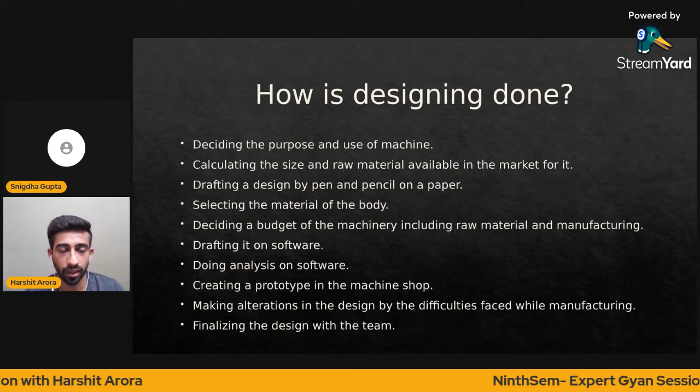So, how is designing done? First, we decide the purpose and the use of the machine that we want to achieve. Then we calculate the size and suggest the raw material necessary for designing the machine. Once that's done, a team of engineers sit together and draft a design by pen and paper, including every engineer - be it from electrical, design, or electronics field. They discuss about the ideas, and then the mechanical engineer works on softwares like SolidWorks and AutoCAD to develop the machine on it.

Once the machine is developed, the role of a mechanical engineer is to do the analysis on the software. Analysis is basically studying the structure, the dynamics, and the statics of the machinery, so that any load or stress calculations or any fluid involved are taken into consideration, ensuring the design meets the needs of the client, and a machine to be used is finalized. Thank you. Next slide, please.

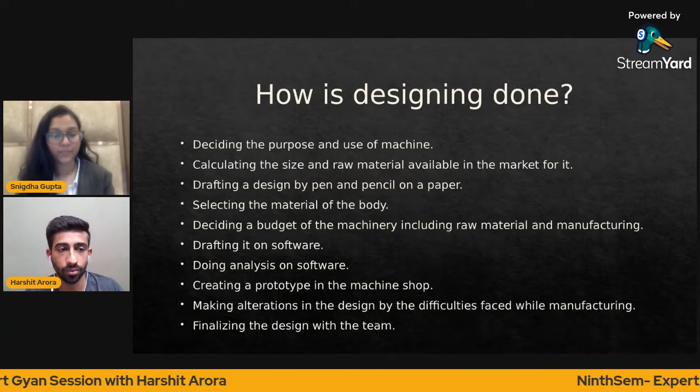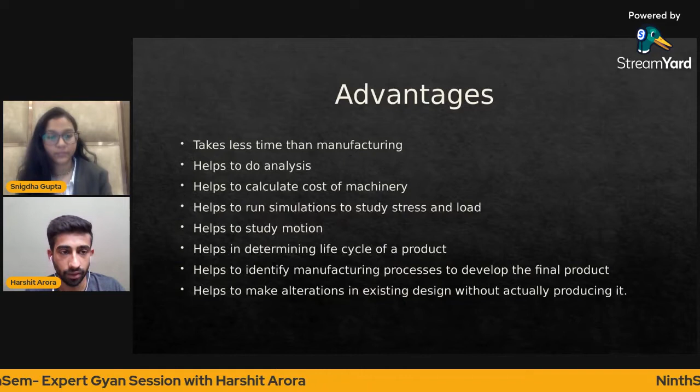So, what are the advantages in designing? The advantages in designing when it comes to manufacturing are that it takes less time, because in designing we can do it on computer, while in previous times everybody used to think of an idea and then do it physically, so as to get to the point that the machine should be manufactured.

So if heavy machinery is involved, it will take a lot of time and money. But if this manufacturing is done on computer, it takes less time and all the analysis can be done on the computer. Also, once the machine is manufactured using older physical methods, there might be defects, requiring redesign and more time and money. But when designing was developed digitally, the machines and every part can be minutely studied, and the time and money involved can be reduced to a minimum. Next slide, please.

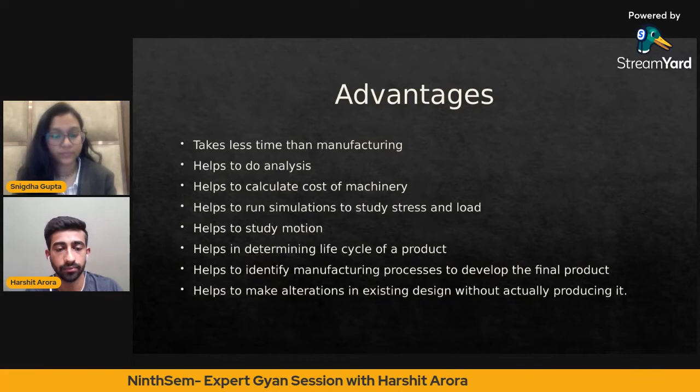So the various design software that I use and a design student should be using in order to make their career in designing should be AutoCAD 2D drafting, AutoCAD 3D, that is Fusion 360, SolidWorks, CATIA, Pro E, and NX. These are the software that a person should know or use in order to get to know about the design. These softwares can be learned on any platform, be it YouTube or any courses, and you can study it.

Once the design is done, the most important step is the analysis part, because design can be designed by anybody, but it has to be feasible and has to be manufactured correctly in order to meet the industry standards.

So for that, we use different softwares like ANSYS for finite element analysis, CFD analysis when fluids like gases and liquids are involved. We use SolidWorks, Fluent, HyperWorks. When it comes to checking cooling systems in HVAC etc., we use Flow therm and Ice Pack. Also, MATLAB is used in order to check the analysis and design of the machinery.

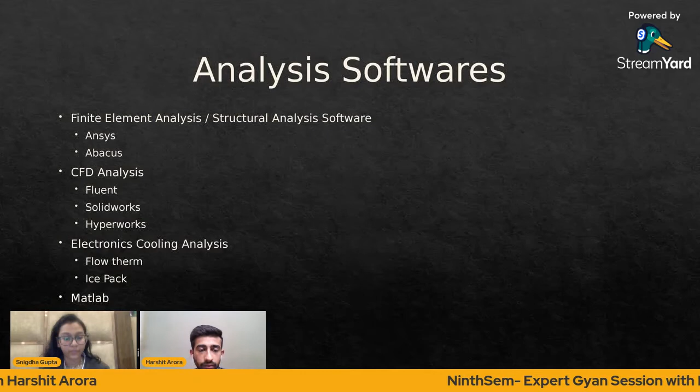Also, a student should know Python, C++, and other visual basic coding languages at a basic level, because these softwares require a coding language to be learned by the student. Also, Microsoft Excel is a useful tool in this, because these tools are data-driven tools, so in order to study and provide data to these softwares, Excel has to be learned.

Design standards. When it comes to designing, there are a lot of design standards that are involved. So you cannot just design anything which comes to your mind. There have to be rules and regulations that have to be followed in order to design something.

Like when a coupling or a flange is designed, it is to be designed in the inches system, or a gear has to be designed. So the pitch, the number of teeth, diameter, and depth of teeth are standardized, and that is the way those are manufactured.

So the design standards are ruled by various organizations like ISO, the International Standard Organization, ASME, the American Society of Mechanical Engineers, and European norms are also used.

So as we funnel to the design opportunities that are present for various students, there are various fields and a number of fields where design can be used, and mechanical engineers are being employed.

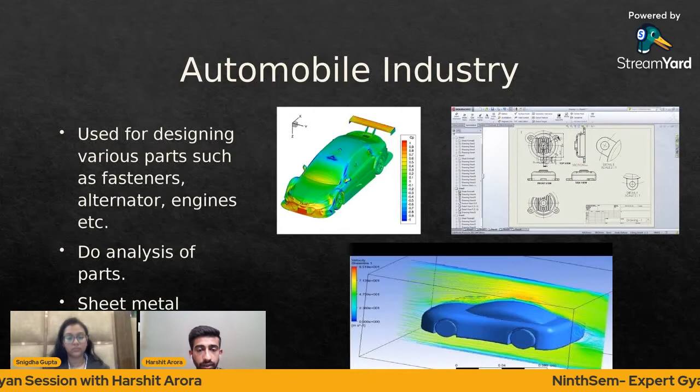So next is the heavy metal parts in industry. Then next is the aerospace. This is the second slide, I guess. Automobile, then heavy parts, I guess.

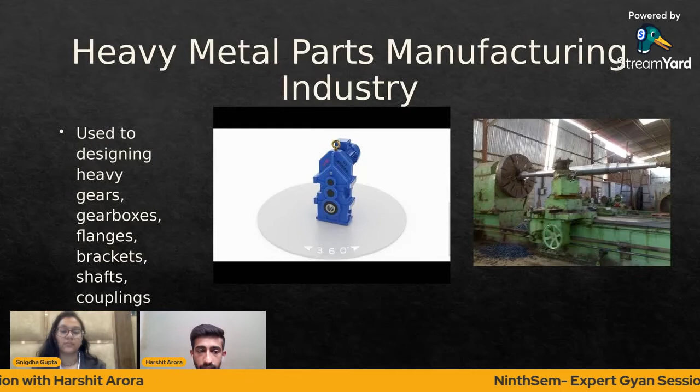Next is the aerospace industry. Aerospace industry is developing nowadays and everybody is inclined towards it because everybody has an enthusiasm towards space. When it comes to aerospace industry, very minute and small parts are used, and since this carries a lot of people in it, safety is the most important part. Design engineers play a role here in that when any part is designed, it should be designed with utmost cautiousness, and exact knowledge is needed by the engineer so that they can design a specific part suitable for this machinery.

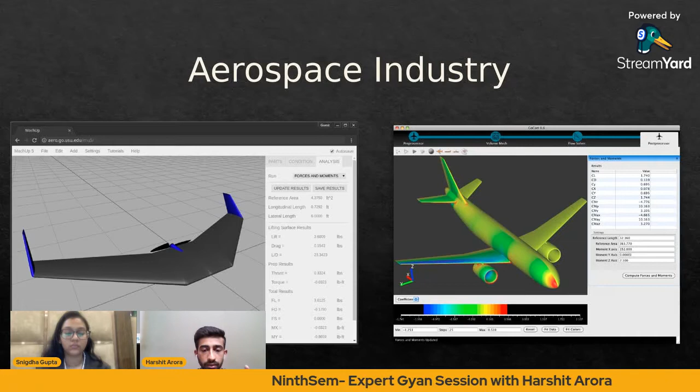Now I have shown here the analysis of the aeroplane to check the drag, the thrust, and everything. Every time we don't have to manufacture an entire aeroplane, we can just change things. Supposedly the wingspan of the airplane here is 10 meters, so we can change it to plus minus 5 meters and check what is the drag or what forces are implied on it, without manufacturing an entire aeroplane. So design plays an important role here as the cost of the industry, the machinery, and the company is reduced.

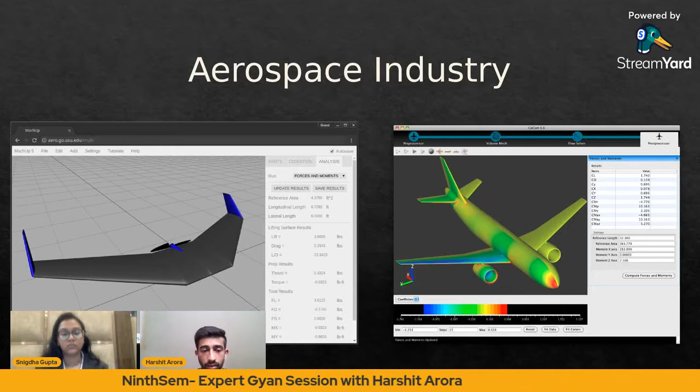Now comes the plastic industry. In plastic industry, be it injection molding, now the plastic industry has switched to 3D printing, but there are a lot of industries, be it the toy industry or the pet bottles that you see, where these dies are used. These dies are manufactured and designed by design engineers, who design them so that the extrusion by the injection molding machine is done properly, and the design has to be peculiar, along with the materials used in the molding machine.

The die should be specific to the needs of the machine, because if we choose a material which is not good enough for the machine, there might be chances that the machine bursts or something happens, which will affect the safety of the operator. So it is very important for the design engineer to choose the correct material. For that, the subjects discussed before have to be studied in depth by the engineer, so that the correct material can be used.

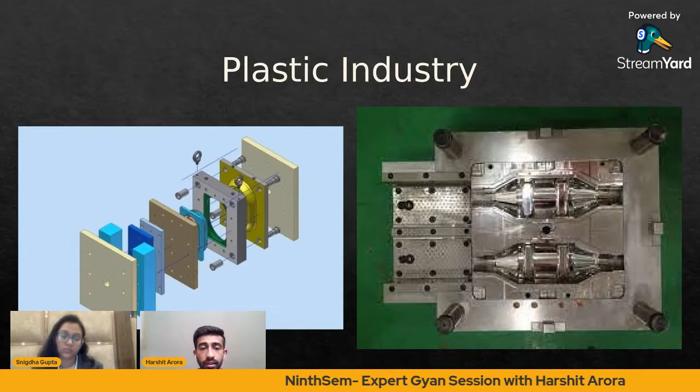Robot manufacturing industry is booming currently, as everybody is moving towards an industry where humans and robots can correlate and work dependently on each other, so that in environments where the safety of the worker is at risk, robots can be used to help the industry. Also, when it comes to increasing production, since robots can work for 24 hours infinitely but workers cannot, these robots are replacing humans.

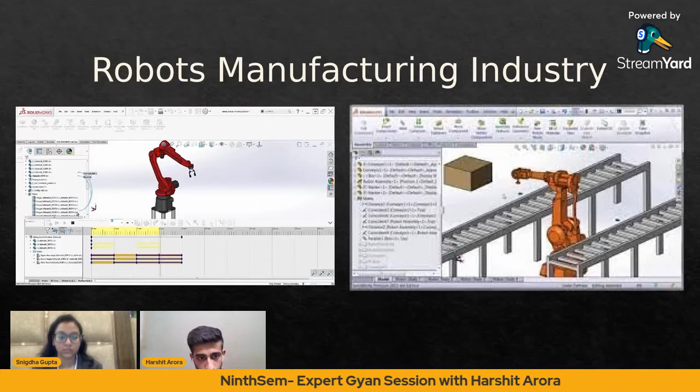When it comes to precise parts, these robots are very helpful. The role of the design engineer here is to study the requirements of the industry. Supposing an automobile industry needs a robot, they need to study and understand what kind of motion is needed by the robot, and then the design engineer studies these motions. First they create the robot design using motors and everything, and then on the software they dedicate a specific motion to these robots, which is studied. Once this motion is finalized, the manufacturing of the robot is done. So robot manufacturing is growing very much these days.

When it comes to the medical industry, since prosthetic arms are a lot needed right now, be it legs, hands, or any other organ, the design engineer has to design the arms and legs and everything according to the needs of a user. This is done by measuring the entire environment and the body parts of the person, and then according to their needs they design a part to be installed, which helps the person.

The second use of the design engineer is in manufacturing of various machines used in hospitals, like small dental machines, MRI scans, and X-ray machines. Nowadays people are switching to robots for surgery, because surgeries require very precise and peculiar movements, and there might be chances of human error. To avoid that error, robots are now being inducted into the medical industry. So as a design engineer, his role in this industry is to design such surgical instruments in order to cater to the people and to the operations in the medical industry.

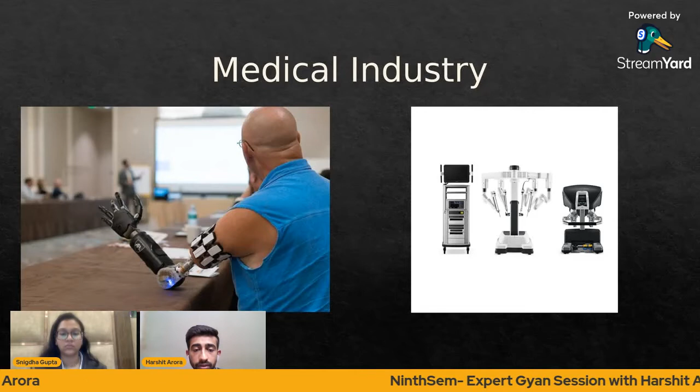For that, a team of biologists, doctors, and engineers sit together and discuss the use of the machine, and understand the process it will go under. After that, the design engineer designs a machine for the surgical needs.

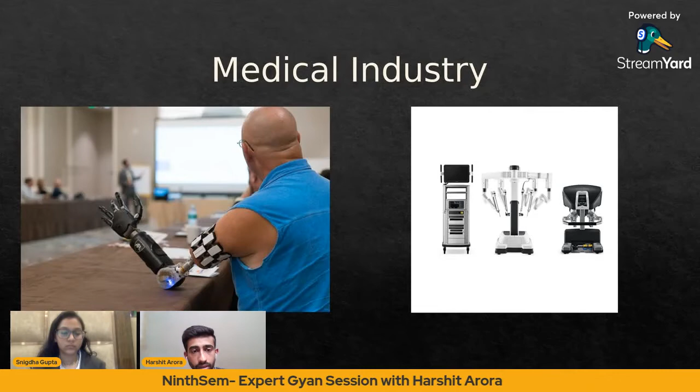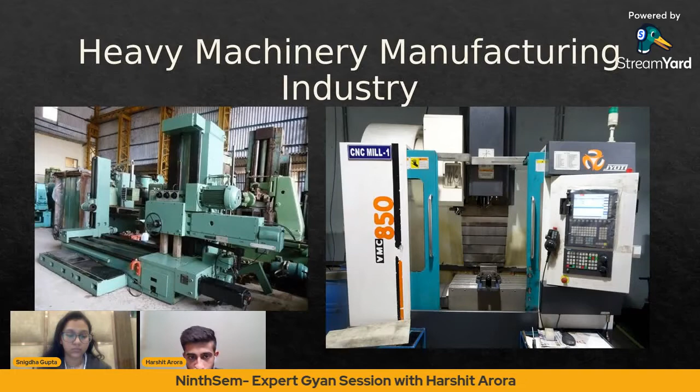Now, HVAC manufacturing is another field in which design engineers are used. Here, their role is to study the outline of the entire structure. Once they study it, they should know where the pipes should go and where the plumbing linings should go, in order to design a specific system so that the cooling or heating of the environment is done in a specific way. For that, engineers, specifically design engineers, discuss and study the diameters of the plumbing systems, the type of flanges used, and the type of raw material used.

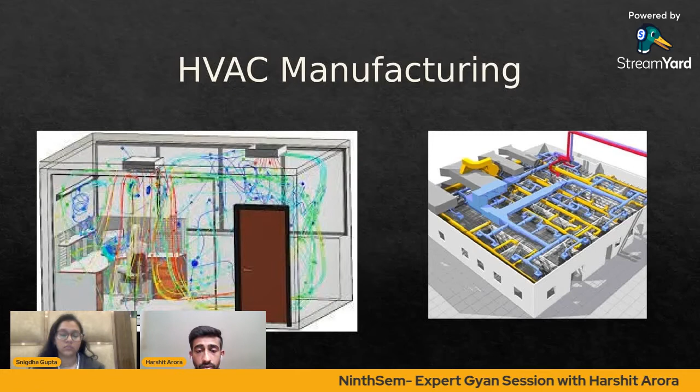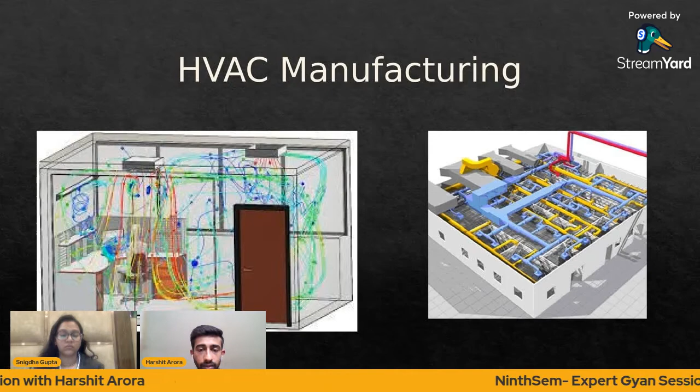Once the material is decided, they need to do CFD analysis to study how the room is cooled, how it is heated, and the piping system—from which pipes the cool air should go and from which pipes the hot air should exit. Everything has to be studied by design engineers, because we cannot make an entire system again and again, as that would not be cost effective. So these are studied on software, and once people are satisfied with the design, the manufacturing is done.

Now, shed manufacturing is another industry. For big plants, sheds are used. The design engineer's role is to study the materials available in the market, be it beams, T-shaped joints, rectangular bars, or anything else. Once they design the structure, they study that the weight of the shed should not exceed much, so that after a certain lifespan the shed doesn't collapse. Stress and load analysis is done by design engineers, and various settings are changed, like the size of beams and rectangular pipes, and the type of trusses, in order to check which is the best suited design for the shed.

In previous days, we didn't have design engineers or anybody for this. It was done either by physically installing things or by the idea of people who had already worked on similar projects. This experience was good enough for people, but in the long run, if something went wrong because of relying on experience alone, the safety of people under the shed would have been compromised. So now, design has helped everybody understand the structural capabilities of the shed, which is where design engineers are used.

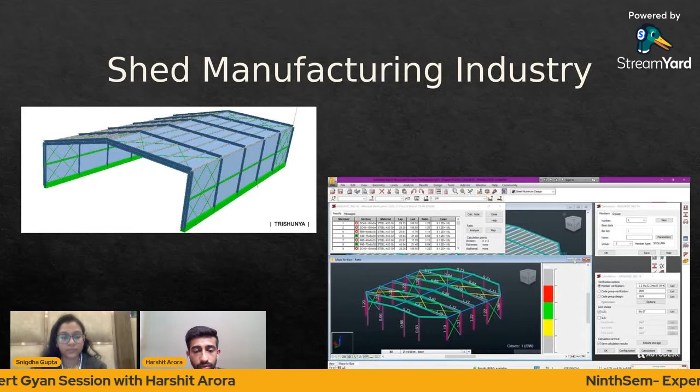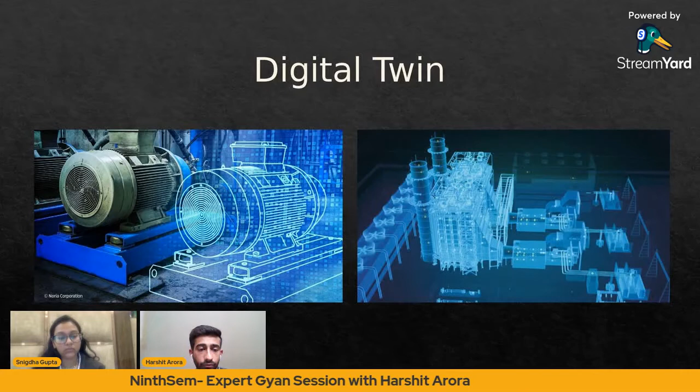Digital twin is an emerging technology. On the left, you can see a motor. This motor is twinned, meaning a parallel motor is created by a design engineer in software, where the movement, RPM, and type of coil used in the motor can all be set. By making these changes, the outcome in the motor can be studied, so we don't have to...

Hello. Hello, Snigdha. Yes, yes, you're audible. Okay, okay.

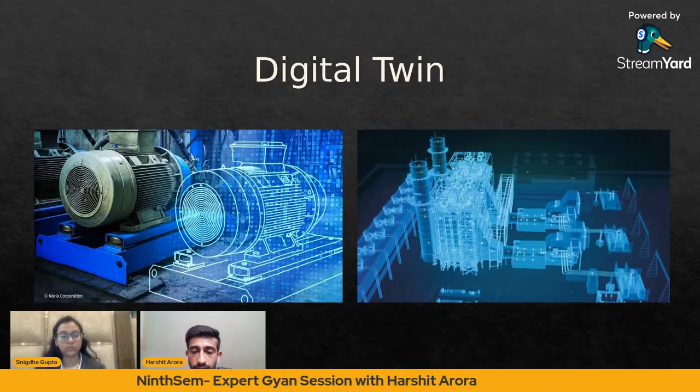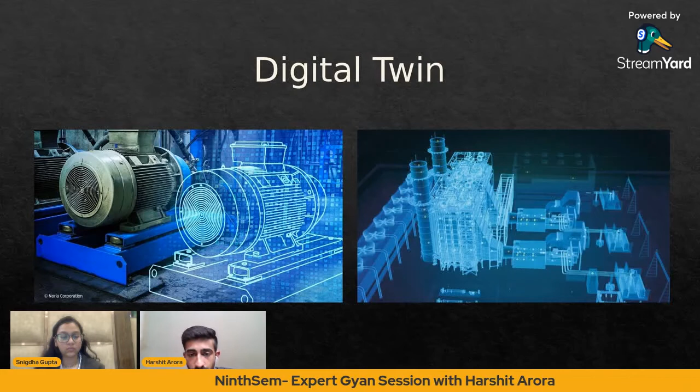So in order to study the motor, a digital twin has been created. Similarly, when it comes to a plant, the entire plant is created on the software. On the right side, the entire plant, chimney and everything has been created by the design engineer, and a parallel plant is created, same as the real plant. Now we can move the machinery or the pipings, check, and make it cost effective. For example, if we have some space in the plant, we can shift the machinery there, reducing the cost of electrical wiring, which increases the profitability of the company.

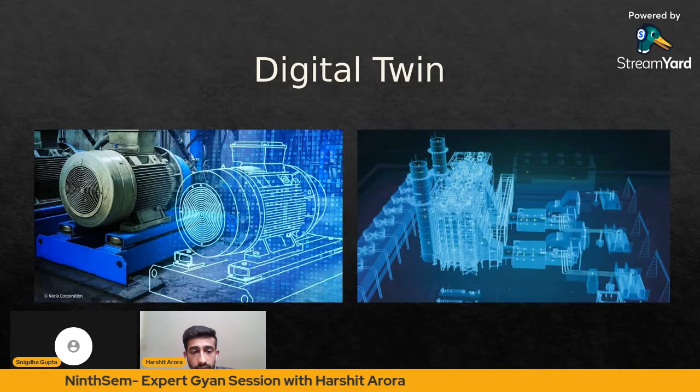In previous times this was not possible, as design engineers and these softwares were not present. Now, with the inclusion of different softwares, we can study everything on the computer and then move ahead and make good decisions for the company which can be profitable.

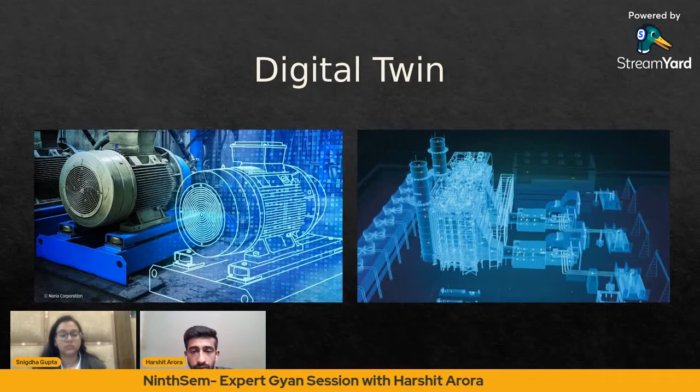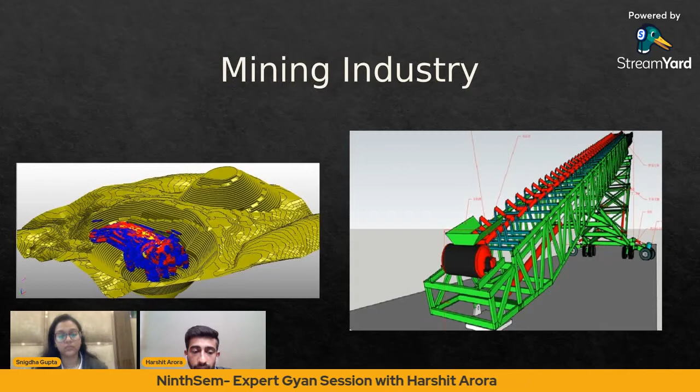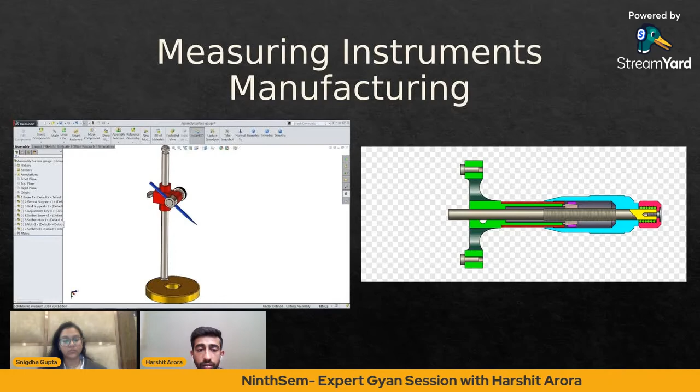When it comes to measuring instruments, they are the backbone of every industry, because even if you create any component, you will require measuring instruments, and these must be specific to the needs of the person. Also, many gauges are created; for example, if 1,000 parts are to be created, a micrometer will not be used every time—instead a gauge is used to measure these parts. This gauge must be designed to be feasible and easy for the operator to use. The role of the design engineer is to design a measuring instrument specific to that industry, streamlining and fastening the testing process so many parts can be tested in one go.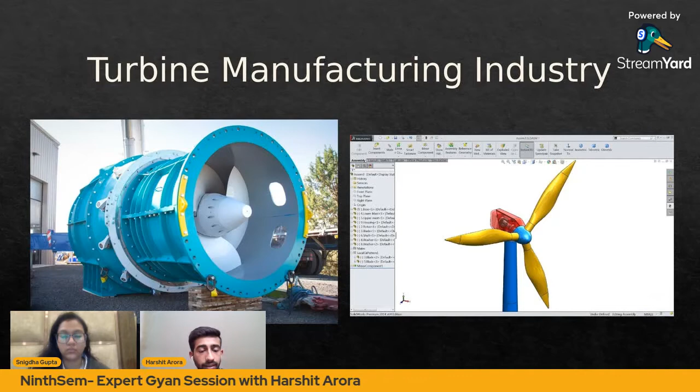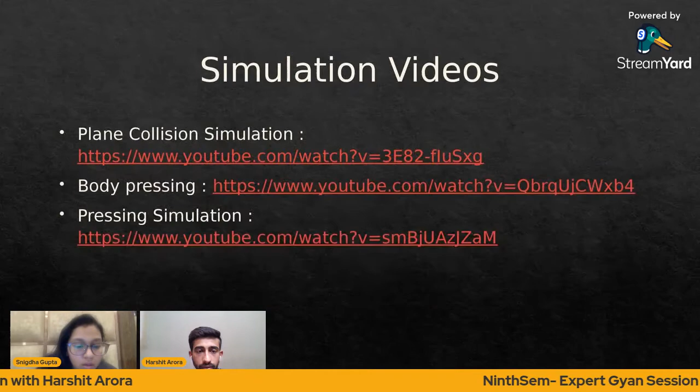These are some simulation videos—Snigdha, can you play the first one? You'll have to click on the link, which will open YouTube. It's actually not working.

It's not working. Is there any way we can play these videos? I don't suppose so, I think we'll attach it afterwards. Okay, I'll share the link at the end, not a problem.

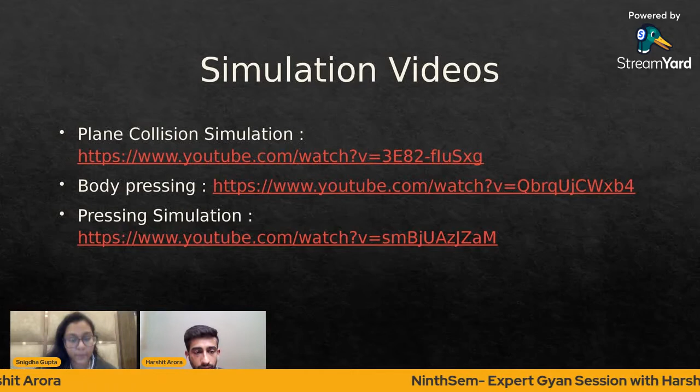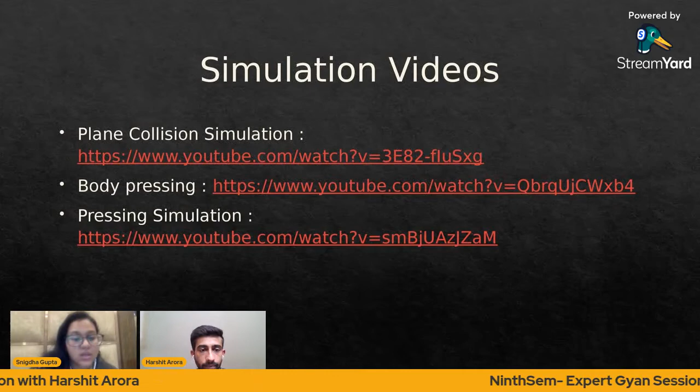So these are some simulation videos that I wanted to show, which helped us learn how simulations can be studied in different ways. You will watch these videos and get an idea of it. I'll share this video after the session.

When it comes to manufacturing and designing such things, it is very important to know the metal forming processes, because the design engineer should know which processes should be involved in designing such parts, so that he does not design any vague object. He should be very specific to the design he has, so he should know all the manufacturing processes that will be needed in order to design the item.

Let us take the example of a toy. The toy can be designed by prototype, using injection molding. But if the design engineer does not know about injection molding, he might suggest a process like 3D printing instead. 3D printing is an expensive process, which will increase the cost of manufacturing, and the toy which is to be produced for 100 rupees will now be produced for 500 rupees, which is very wrong.

So design engineers should very much know all the manufacturing processes in order to suggest the best manufacturing process, because the next thing comes computer aided engineering after CAD design, and then computer aided manufacturing. This manufacturing involves the correct choosing of the process which is to be used.

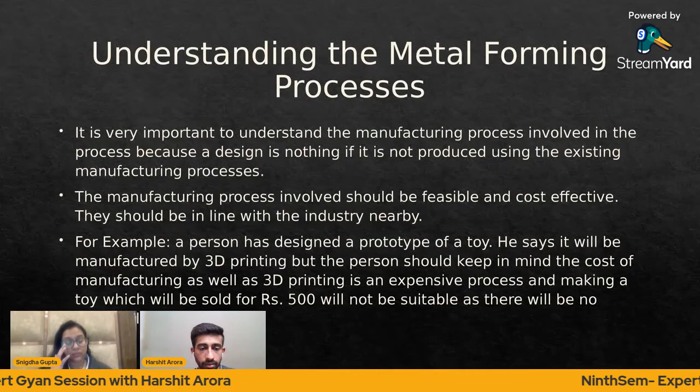So these are some of the advanced metal forming processes that are used in the industry. The design engineer should know all these processes and which is best suitable for their design. These include metal forming in 3D printing, plate bending, shearing processes, extrusion processes, and forging processes.

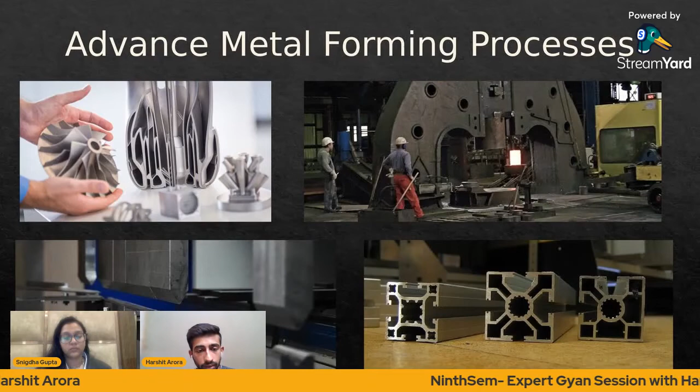Industry has now shifted to Industry 4.0, where the machines are capable enough to work on their own, and no operator is needed to run those machines. These are run by inclusion of AI and machine learning in them.

For example, there is a robot that performs a specific task. AI and machine learning help it learn about its movement, and this can be inculcated in other robots. Now you can use cloud computing and analytics, and the internet of things can be used to operate these robots just by your mobile.

So the role of design engineers here is significant, since they are good with computers, good with technology, good with coding languages, and good with simulations. In order to develop these tools, be it machine learning or inclusion of AI in robots, the role of design engineers along with computer engineers will be of very much benefit.